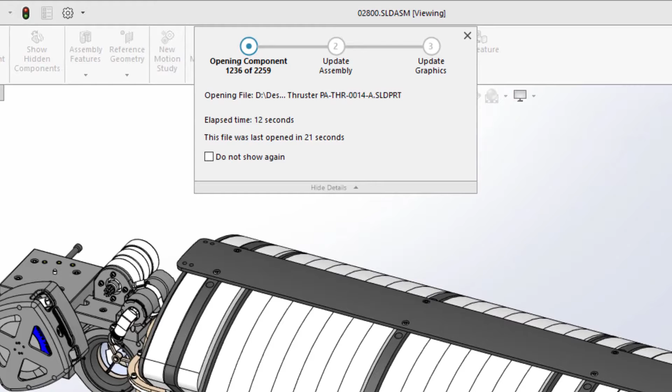You demand the best performing tools so you can work as efficiently as possible. SOLIDWORKS 2021 delivers multiple new enhancements to access your data faster and work more efficiently. Open times for both resolved and lightweight assemblies have been improved in SOLIDWORKS 2021. This 2259 component assembly opens in only 21 seconds, making getting into your designs faster than ever. The larger the assembly, the greater the gains you will see while opening them in lightweight mode.

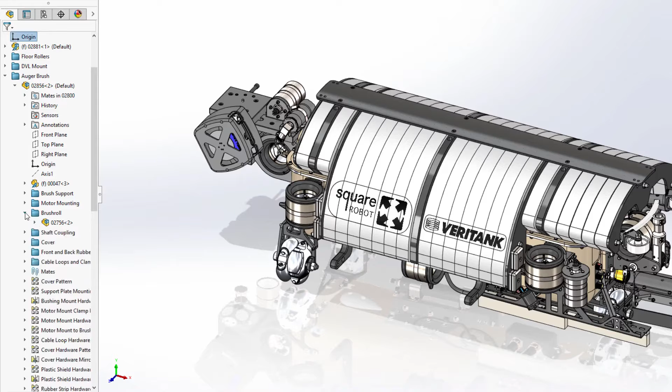To improve working with lightweight components, there is now also a more streamlined approach to accessing their assembly and feature information. Simply expanding a component from the Feature Manager tree will now dynamically load those components on demand, giving you access to the fully resolved subassembly or part. This prevents unnecessary loading of large assemblies, but also allows you to quickly access and resolve the components you're working on as needed.

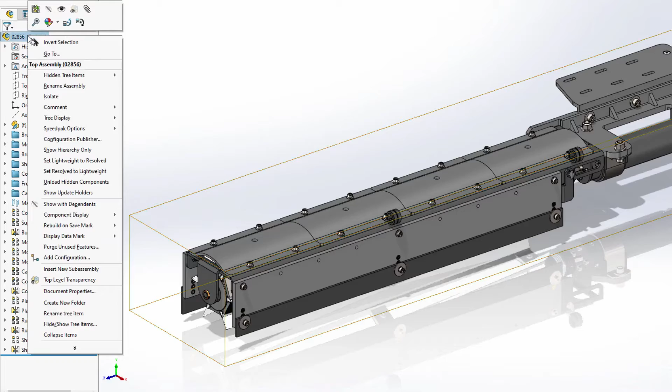Working with configurations in SOLIDWORKS 2021 is now also faster. Both switching between and creating new configurations are now significantly faster for assemblies.

The Performance Evaluation tool within SOLIDWORKS has always been an invaluable resource to give insight into areas of a design that may cause performance degradation. New for SOLIDWORKS 2021 is the analysis and reporting of circular references within an assembly. In this case, two holes on two separate parts have been found to reference one another. You can use this information to further investigate the design and determine how they're referencing one another to fix these issues.

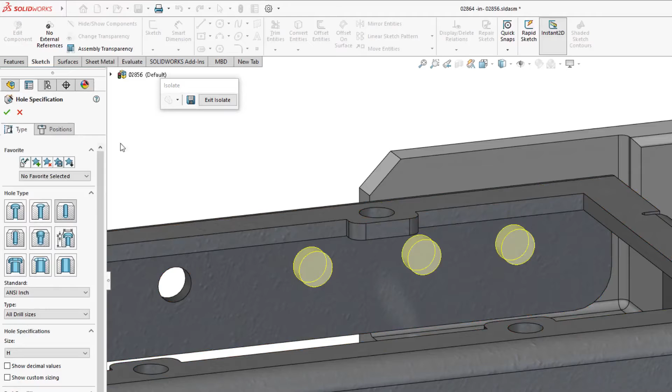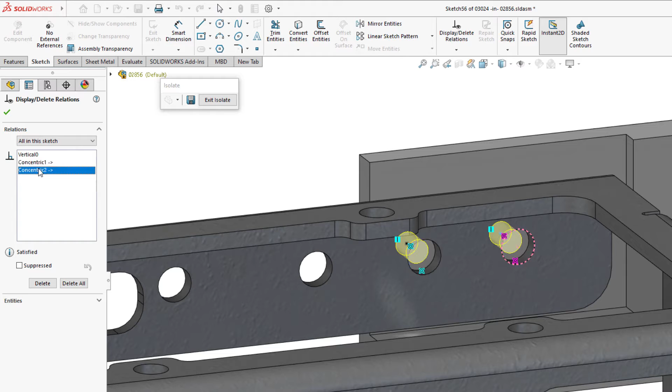In this scenario, one of the components listed in the report contains a hole wizard feature, where its location sketch has center points that are referencing the edges of a hole in the adjacent part to locate them concentrically. This is a common top-down design practice to ensure that holes always remain aligned to one another. However, on investigation of the second component's feature, also a hole wizard, it appears that the center points within this sketch are likewise referencing the edges of the previously interrogated holes. This creates a circumstance where both features are trying to define the location of each other, or a circular reference.

To fix this scenario, the best course of action would be to remove the external references and redefine the location of the hole centers in one of the sketches, in this case dimensionally to the part they reside within. Once the changes have been made, a quick rebuild removes any warnings from the assembly.

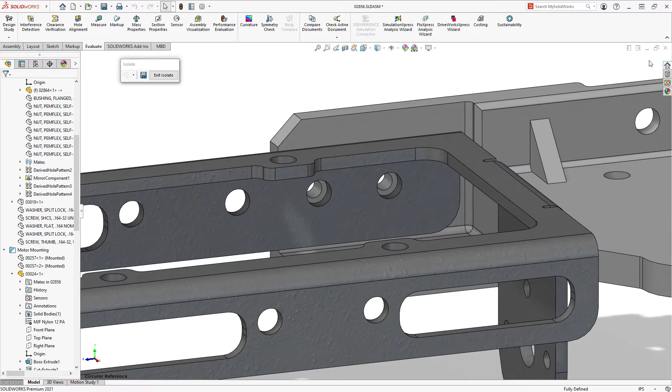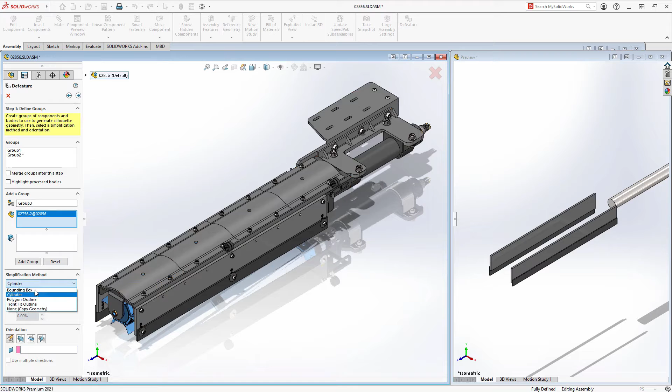Finally, you can use Silhouette Defeature, introduced in SOLIDWORKS 2020, on an assembly to create a simplified representation of it, or to protect proprietary information. Silhouette Defeature provides an intuitive step-by-step workflow to define this simplified version using a variety of geometry simplification tools. While you are selecting the components, bodies, or subassemblies you want to simplify, you will always have a side-by-side view to show what your finished representation will look like. This ensures that you can capture the correct amount of detail.

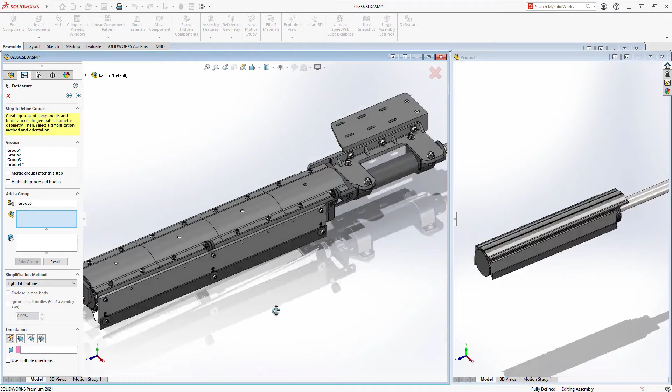The methods you can use to simplify your geometry range from something as simple as a bounding box or cylindrical representation of the components, or something a little more complex, like the polygon or tight fit methods, which add a little bit more detail to the final results. Perhaps some of the components in your subassembly are critical to show in a top-level design, even within a simplified representation. For those instances, you can choose the copy geometry method to capture all of the detail of those components, bodies, or subassemblies.

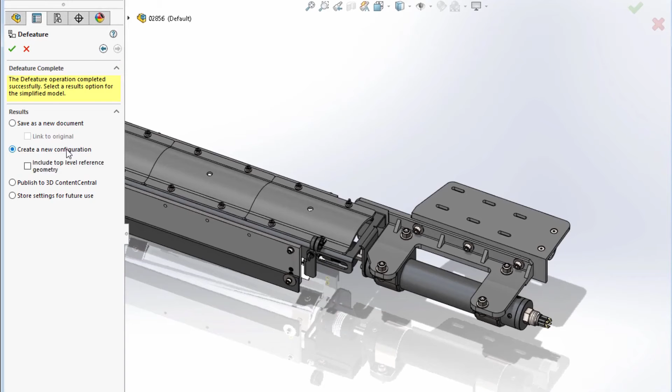What's new for Silhouette Defeature in SOLIDWORKS 2021 is the ability to save this simplified representation as a configuration within the same assembly from which it was created. This eliminates the need to manage a separate file that contains the simplified model. You may still want to use those other methods when using Silhouette Defeature to remove proprietary information from a design to share outside of your organization as a separate disconnected file.

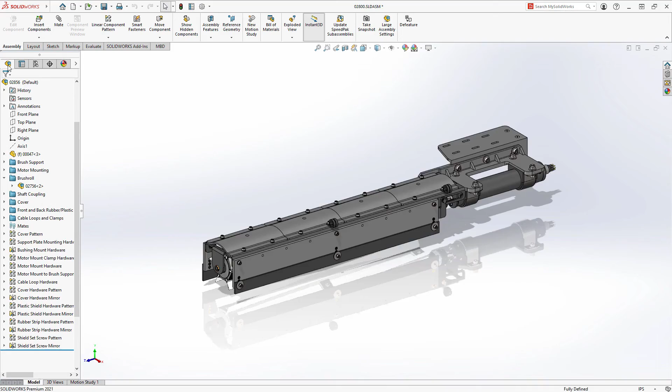However, when using defeatured models within higher level assemblies, it is now as simple as right-clicking on the component and choosing to use the defeatured version. Defeatured assemblies as configurations provide a way to both simplify complex assemblies visually and also add a performance boost in cases where the detail of the individual components isn't necessary. With these new performance-oriented features in SOLIDWORKS 2021, you will be able to work faster and more efficiently with larger and more complex designs.